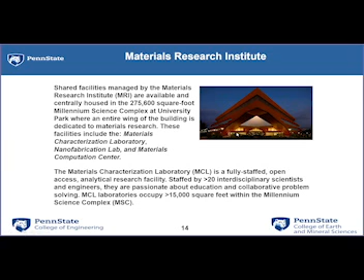But as you can tell, the materials characterization lab itself is really, there's a bit of a Zen garden here in the front of the Materials Research Institute. And probably 50 to 100 feet underneath that is where the materials characterization lab is. And you'll see why we need to have these vibration proof rooms, these very specialized rooms, in order to handle some of the equipment that we have available.

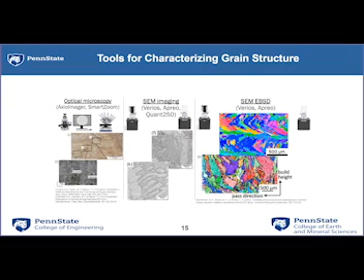So we do a range of different things. And what I typically like to show people is the areas within the lab that allow us to look at very specific things. We have, for the most part, optical microscopy, basically microscopes, and scanning electron microscopes that allow us to see grain structure. You start thinking of powder metal parts, this would be looking at a finished part, whether you have a part or a design that might be giving you some issues with premature failure. These types of tools are there for that.

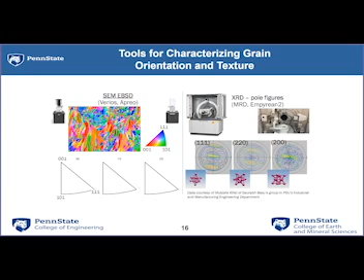And we can go a little further using scanning electron microscopy and really start looking more closely at grain structure, understanding maybe some of the failures you might be having or process issues you're running into. We can delve into, not quite atomic scale, but getting close to a nano-type scale evaluation of your parts with X-ray diffraction, scanning electron microscopy, and understanding chemistry. For a lot of the metallic components, we use energy dispersive X-ray spectroscopy, and what it tends to give us are these very informative maps.

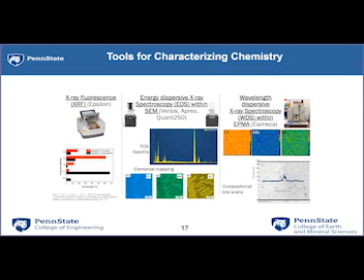So I'm old enough to remember days before a lot of these maps and a lot of these tools. And I would say in the past 15 to 20 years, these tools have really evolved to the point where we are able to probe and find issues and start to understand things that we've never really had the ability to do, with really high precision in the measurements we make. So when we're saying that you have a certain amount of an alloying element at a certain place, we are positive that is correct. And it's a long way from when I was a graduate student back in the early 90s from what we're capable of doing.

These capabilities have really grown, and we're really taking advantage of them to understand these materials. So this is some of the work that I do.

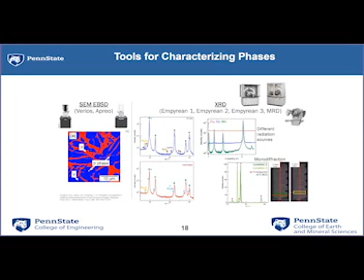I do a lot of work in ferrous materials, whether they are austenitic stainless steels, 300 grade, 304, 316, 310, 308, steels like that. Duplex stainless steels are another area I tend to look at. A lot of these tools allow us to identify phases that are difficult to bring out in optical alone, so we're able to delve much deeper into these materials characteristics. If your internal labs don't have those capabilities, we have very affordable and easy ways to take advantage of a lot of these tools.

And if you really want to get fancy, you can get into transmission electron microscopy, and we can look at atom layer type things.

We also have mechanical testing capabilities, and one of the more interesting things we use mechanical testing for is, rather than just pulling tensile bars and looking at an engineering stress strain diagram and trying to measure yield and ultimate tensile strength and ductility and elastic modulus, we use digital image correlation.

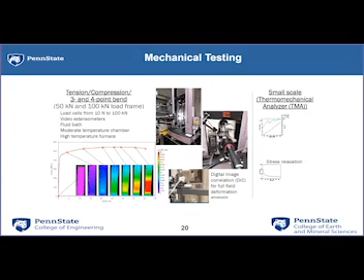Micro and nano indenters - this has gone a long way too. This is a lot beyond what you might have used in school, the manual micro hardness indenter. The micro hardness indenters we use basically map out entire hardness maps of surfaces.

For the most part it uses CNC type tools to lay out a map, and gives us an entire - we can pretty quickly, over the course of an hour or two, take a look and characterize the hardness across fairly large areas.

We can also do nano indentation. This allows us to go in and look at really fine areas, much smaller than the Vickers or Knoop or Brinell hardness measurements that you might be used to taking.

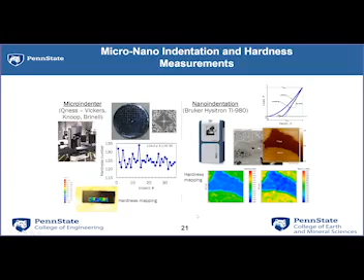We've also been growing in a lot of this powder feedstock characterization, and I'll say it's something I never really thought of before I got into really a lot of the metal powders, particularly in the additive manufacturing realm.

But we typically have your Mastersizer or your Malvern system for laser diffraction measurement of particle size distribution. We also do a lot with particle imaging and image analysis, and we go a little bit beyond this to get morphologies of powders. But the other area where a lot of these tools are used, and I never really thought of it, is in the food industry.

A lot of times we have, as you can imagine, with our proximity to Hershey, we have people who do work in chocolate with the creamery. And a lot of those research groups over in food science use a lot of these tools as well.

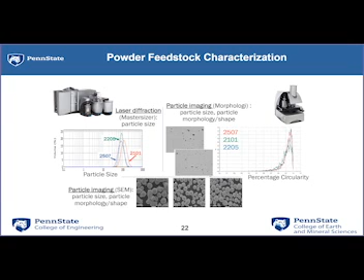So we're really sharing that, and the shared facility that MRI provides us really helps us build some of these other capabilities. From powder feedstock characterization, most of you are familiar with particle size distribution measurements in your labs. We look at them in a number of ways.

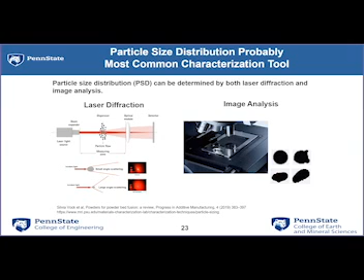On the image analysis side, we're really interested in how particles change shape, whether they're gas atomized powder particles. All of these are just four examples from a single lot of powder showing how particle shape can change even under gas atomization. We go from where we think everything looks spherical to really what some of the other particles look like. So it gives us an understanding of how the powders are impacting some of our additive manufacturing processes.

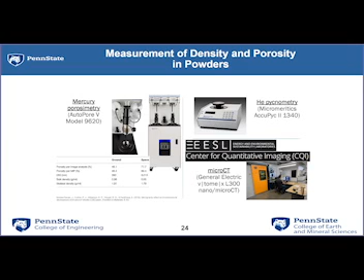We also have mercury porosimetry, helium pycnometry, and one of the more interesting things we do, a higher end research type topic but of interest to industry as well, is our capabilities within the Center for Quantitative Imaging, where we do, for the most part, for lack of a better term, CAT scans for metals.

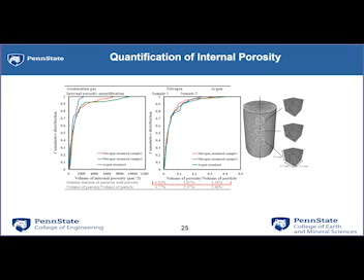What we in my group have done is looked at powder particles, examining fairly large areas of powder particles to understand how they change in shape. But more interesting is how they can have differences in internal porosity, and being able to characterize that internal porosity.

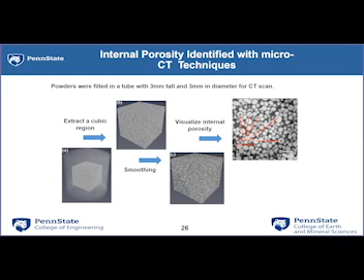Now, when we're looking at some of the other things we do, particularly in terms of powder rheometry, these differences in porosity become really important for us. So those are some of the areas within the Materials Research Institute, the Materials Characterization Lab at Penn State, that are all open to industry involvement. They have special contracting procedures for having you come in.

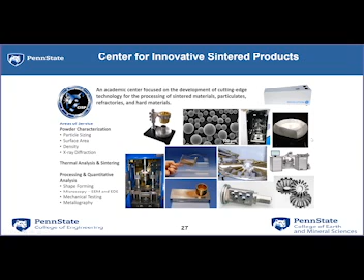We're really delving into new methods for characterizing powder feedstocks, particularly what is called powder rheology. We have the typical characterization techniques and we go through those. But in powder rheology, what we're really trying to understand is how powders are behaving a little bit more like fluids at larger scales, looking at tests that are more indicative of what a powder might actually go through.

Especially in the additive manufacturing field, where we're spreading a powder with a blade, or running powders through nozzles and feeding them into molten liquid pools to build up parts. We have capabilities here at Penn State for different types of techniques.

These go from as simple as a rotating drum, which is really just an image analysis system rotating a powder mass with a camera and measuring avalanche angle, to powder rheometers, where blades and torque meters are used to measure the torque required to move a blade through a powder, or a shear cell, where we can measure permeability and other packing and void space type properties.

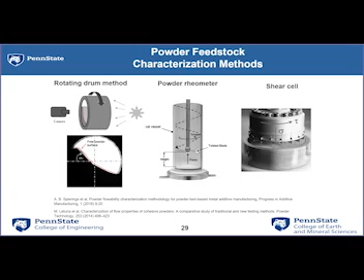We integrate this a lot of times with the computed tomography, or X-ray CAT scan capabilities that we have, to really understand how they all sort of break together and give us a lot more insight into what's going on with the powders.

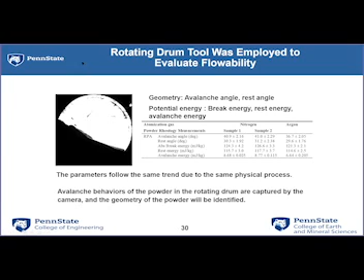So I wanted to run through how we use a little bit of these in the rotating drum, where we measure basically avalanche angle. This tool, we've found, is really good at characterizing powders in terms of how they're going to operate in a powder bed fusion system.

The powder rheometers are much better at telling us about mechanical blending of powders, something you would see much more in an injection molding type system, where you might be moving a powder through with a screw driven mechanical mechanism, which is very similar to what you see in a thermal spray or directed energy deposition type powder feeder that we have available.

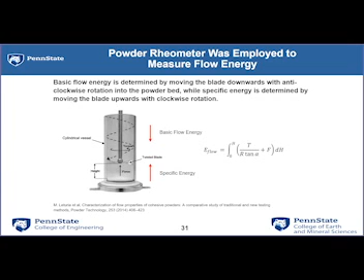As we move on here, our quenching dilatometer is another capability. I always like to show this because it tells us more, not only about phase transformations, but about doing very high resolution measurements of thermal expansion.

We're seeing, particularly in the additive field, as we additively manufacture different components, their coefficients of thermal expansion are not well defined. So we can take small specimens, originating from powder, rod, whatever material you want, heat them up at very specific rates and cool them at very specific rates.

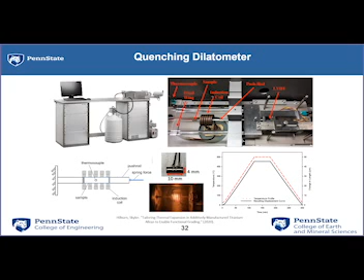With liquid nitrogen, we can go down to about negative 150 degrees C. So we can start understanding transformations of martensite through cryogenic heat treatments that you may be applying to different parts, and start understanding a little more of what's going on within the material, maybe catching things you may not be able to see through more traditional techniques.

And these are some of the high fidelity examples. This is one technique we use to really start to understand how different compositions work, and what this is really showing is one of the real areas of interest within additive manufacturing.

That area is what's called functionally graded materials, where we can change compositions on demand. That's all well and good from a design perspective, but as many of you in the processing and manufacturing industry know, when the rubber hits the road...

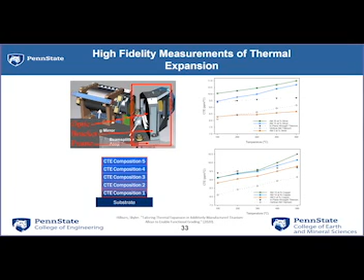...these different compositions have different coefficients of thermal expansion. And the minute you start heating them up and cooling them down, they start to fail. Understanding that is one of the areas we're looking at, and we've done that measurement, and you see some example curves there.

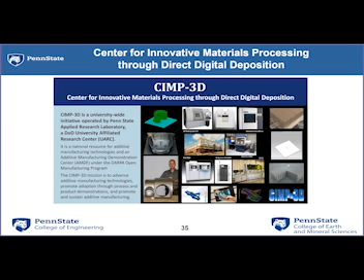Now, the AM parts, if you listen to the hype that's out there, there's a perception that it's going to change everything, that it can do everything. These different techniques don't. If you have an interest in AM, I'm more than happy to talk a little bit more about some of the additive manufacturing and what the capabilities are that are out there.

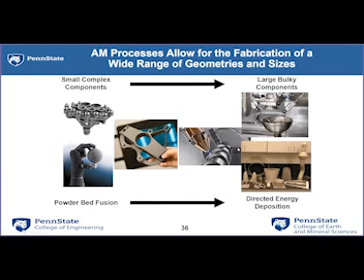But we have a range of capabilities at Penn State, from powder bed fusion to do the real fancy, showcase type things, up to repair of large parts, things that are a little more industrially relevant. As I said, we work in both these systems, and they're both powder-based systems.

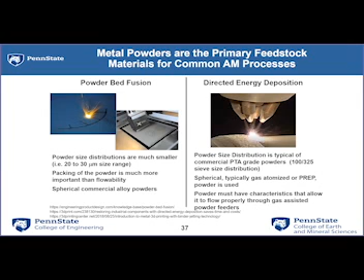For the most part, in the additive manufacturing field, for lack of a better term, you have a lot of people working with metal powders who don't really know a lot or understand a lot about metal powders. So there's really a need within the additive manufacturing industry for people who know how powders are going to behave, how they're going to react and flow, and things like that.

We've been working in this area for probably about 25 years, from laser cladding to deposition type processes, and we've built some of our own systems. This is what might be considered a home built system for directed energy deposition, and we have it integrated with a 12 kilowatt laser.

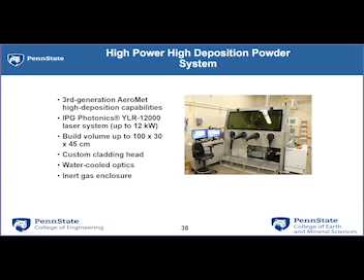We've done about any material you can imagine on this - I would say from magnesium, aluminum, to titanium, to any type of steel you can imagine, to nickel-based alloys. Molybdenum was deposited on this system. Tantalum's a possibility because nobody wants to pay that much for all that powder. But it gives us a wide range of capabilities to build larger components.

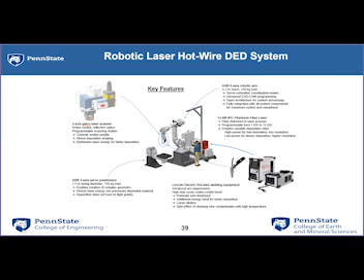We're also working with robotic systems, so there are robotic systems available. These typically tend to be wire-based processes. It's very easy to integrate a gas metal arc or a MIG torch, if you will, onto a robotic head and allow you to build up fairly large parts. So we have that capability here at Penn State as well. Let me give you a little bit of a picture of what it looks like.

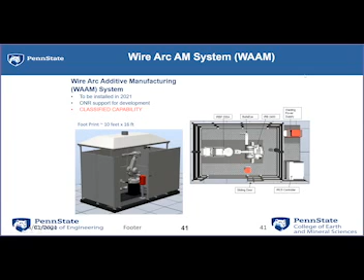And then sort of these wire arcs. So people came up with the acronym. They call it WAAM. I tend to think of the 80s pop band every time I see that, so I want to put an exclamation point behind it. But I don't think a lot of the people who came up with the WAAM acronym really appreciate that. But it gives us those other capabilities. So you can sort of see the wide range of abilities that we have within Penn State and where the powder industry comes in there.

Now, as far as industry collaborations, I want to bring up two in particular. The Manufacturing and Materials Joining Innovation Center, Ma2JIC. Now, what NSF, or National Science Foundation, has done is they've developed this concept of these centers where you can conduct research. And so there are a range of universities in there. So this gives us access to not only that school in Columbus and Ohio State, but Lehigh, Colorado School of Mines, University of Tennessee, Knoxville, the University of Waterloo in Canada, and Penn State are all members of this, with thrust areas in a number of industrially relevant areas.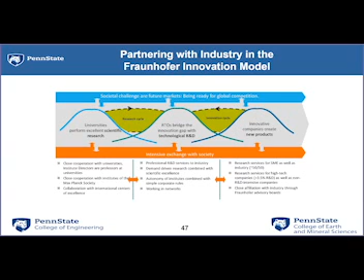And so within the Fraunhofer system, if you're not familiar with it, it's the German institute. It is highly successful in Germany at really being able to build relationships between universities and industry and government. And what it allows is to really go over what we consider this valley of death within the innovation cycle, of going from nice things that universities might do into things that are actually products, and working through a lot of that. And there are opportunities to partner, and Penn State right now is looking for potential companies to partner with on developing this type of model.

So at that point, I'm going to turn it over to Daudi, and thanks a lot for putting up with a lot of that. But once again, if you have any questions, do feel free to contact me. So I'll turn it over to you now, Daudi. Thank you very much, Todd, for extensive coverage of the capabilities and opportunities at Penn State.

Ladies and gentlemen, my name is Daudi Waryoba. I am Associate Professor at Penn State DuBois and the coordinator of the 4-year Engineering Applied Materials program. And as a satellite campus, we too have full access to all the facilities at the main campus. So any of the capabilities that we don't have over here are supplemented by what Professor Palmer has highlighted.

Our campus is very fortunate to share a healthy symbiotic relationship with our local industries. We usually provide them with technical assistance, and they can use our equipment for free. And in return, they supply us with most of the materials. And whenever we want to process our specimens with industrial settings, they usually don't hesitate to give us time in their busy schedule. And for that, I thank you very much.

And I know several of the participants are from our local area industries. I really thank you very much for the assistance and support you have been giving our program.

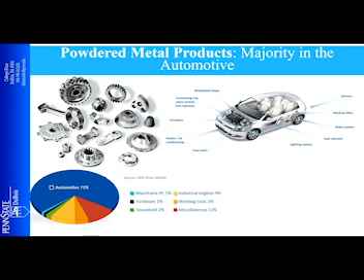Yeah, so due to this tight emission control, we are expecting a declining trend in terms of the PM volume sales. And the data is showing the electric vehicle market alone is expected to soar to about 5 trillion by 2030, with investment going up to 330 billion between 2021 and 2025. So you can see this is not something which can be ignored. The PM industry has to jump on the wagon.

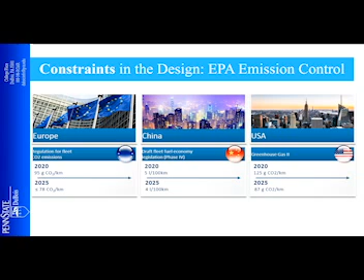So today, what I'm going to highlight is a few projects that we have been doing collaboratively with our local area industries that are focused on automotive parts. The first project is on, oh, sorry. Yeah, so the first project is on cold sintering for high performance powder metal parts.

This is a project where the lead investigator is Dr. Ramakrishnan Rajagopalan, and the current collaborator is Horizon Technology Inc. And it has several potential applications, including cemented carbide, soft magnetic and soft magnetic composites, green machining, densification, and high strength sintered parts. This is one of the projects that was also funded in 2020 by PA Manufacturing Innovation.

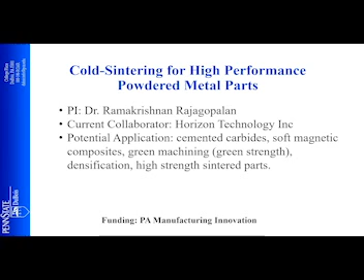Now, cold sintering is something which was adapted. It's a process which was adapted from the work by Professor Clive Randall at MRI, the Materials Research Institute. They work on ceramics, so they've been doing a large body of work on cold sintering of ceramics. So Professor Rajagopalan thought we can also try to see if we can apply this method

for metallic materials. It's called cold sintering because for ceramics, this can sinter ceramic materials at relatively low temperatures. In the case of metals, of course, we don't expect them to be sintered at that low temperature. However, this method gives you properties which are much better in compacted parts.

So if you think about what happens during the cold sintering process, which is usually done under pressure and temperature over time, there are several stages. What you find are what we call multi-mechanisms with coupling effects from mechanical and chemical. Yes, there's a chemical one, what we call hydrothermal reactions, which usually happens.

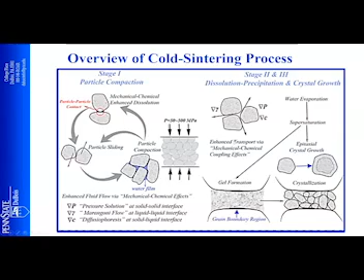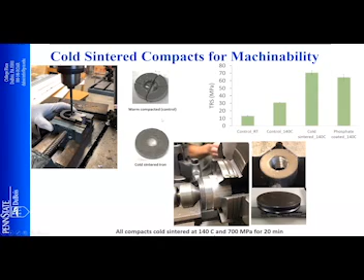So the opportunities are wide, and we are open for any collaboration from the industries. Yes, at this point, we are right now collaborating with Horizon for this soft magnetic composite, but there are other opportunities where you can use this method.

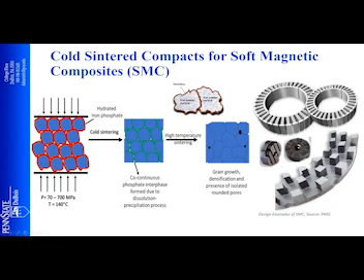Now, the next project, which I'm also going to share with you, is in automotive parts. With all these tight emission controls, one of the solutions is to reduce the size of the engine while still requiring the power, so you need high power density parts, which can sustain both mechanical and thermal loading during operation.

Those require a new way of thinking about what type of parts we should have to provide this kind of high power density. So right now, we are working with SIMCO to fabricate new materials of copper, nickel, silicon. Most of these materials are usually wrought materials, where they are rolled and then age hardened.

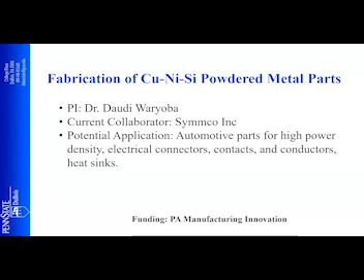But here, we are trying to see what we can do with our PM technology, if we can produce high strength, high thermal conductivity and electrical conductivity parts, which would be very good, especially for connectors, cylinder seats, cylinder valves. You need materials which give you not only strength, but also thermal expansion coefficients, wear and friction properties, as well as corrosion

resistance. So copper, nickel, silicon is one of those alloys which can be used in those high density parts when you think of downsizing internal combustion engines. We're working with Symmco, and we have seen considerably better properties of the copper, nickel, silicon.

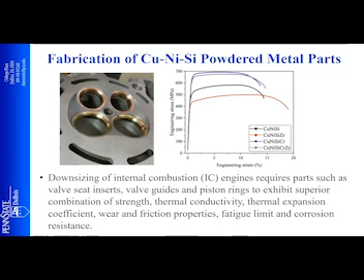The benefits of this alloy come from precipitation. That's why we have copper, nickel, silicon, and we're also adding alloying elements like chromium and zirconium to enhance the precipitation. With copper, nickel, and silicon, you get silicide particles when you're doing age hardening. They are the most important in giving you the strength required for those high density parts.

And at this point, we are showing very promising results. And there are so many opportunities, not only for this, but for other parts, especially when you're talking about electrical components.

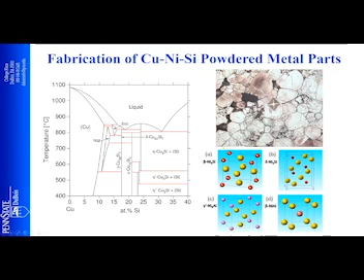Now, the next project I'm going to share is the diffusion bonding of bilayer silver graphite copper. This is a project we have been working on for a number of years with Contact Technologies, and it's showing considerable application now, because we can use the cold sintering technique for diffusion bonding. We have seen benefits when using cold sintering to create bilayers, and there's also opportunity to do multiple layers.

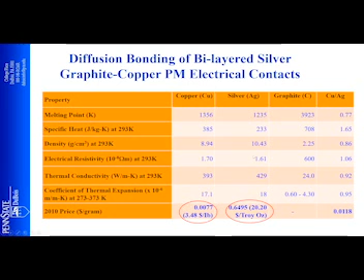In the case of copper graphite and silver graphite composites, Contact Technologies wanted to reduce the cost of silver. Silver is highly expensive compared to copper. So having bilayers or multiple layers of copper and silver becomes much more cost effective compared to having a contact of only silver.

So the bonding is essential, but having graphite is also a problem. Graphite gives you wear resistance, especially against arc erosion. However, it also presents a major problem in bonding the two parts, the silver and copper. So through our work, we came up with interlayers, and we have seen better interlayers working, and now with the cold sintering technique, we are getting better results.

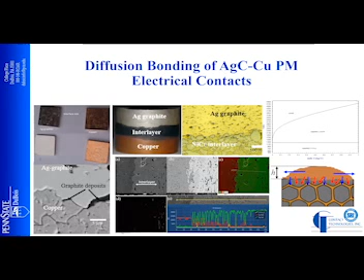This opens up a variety of opportunities, not only for electrical contacts. You can see the opportunities to have what we call multi-layers with different properties: mechanical, electrical, magnetic, thermal properties, or you can even come up with what we call functionally graded materials using these techniques. So the opportunities are wide, we are still exploring, and we are open to working with industries. There are so many opportunities through this method.

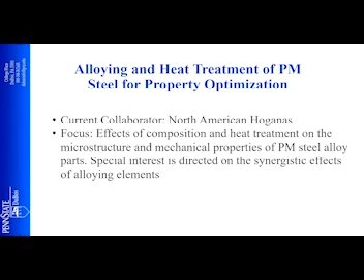Now, last but not least, we are also working with North American Höganäs, and here the microconstituents, especially with steel alloys, are very important. It's very important to understand what percentage is martensite, bainite, or austenite in the materials, because they all affect the mechanical and other properties. So having a better quantitative method of characterizing the structures is fantastic.

So we are using not only some of the equipment we have, the same as Professor Palmer showed you at University Park, in order to quantify especially how much retained austenite we have when we're talking of bainite. In terms of lower bainite, upper bainite, how much ferritic structure do I have? How does that affect the material properties?

For most of the PM steel materials we have here, it's always those microconstituents that affect the mechanical properties. And now we have X-ray diffraction, which will help us measure the residual strains in the materials, which we can also quantify and correlate with how much retained austenite we have in the materials.